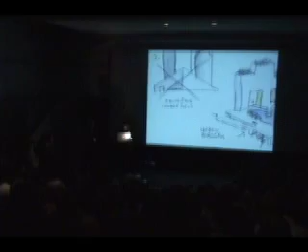Another case is MIT, in the dormitory—I go back and I'm totally amazed at how much junk people put in their rooms. It's incredible how much stuff they can hang in there, like guitars hanging from the ceiling. In other places they have different opinions. So I think it's a charge to go back and look at your work and see how people are using it. It's very important to do that.

So you know this story—I think we're not going to talk about this building much since you know these points. The basic building went into a kind of tailspin in August, when it was casting too much shadow on the adjacent sites. We took the sun diagram that required 2 hours of sunlight on these adjacent houses and sliced the building according to the sun, and that's what gives it its shape.

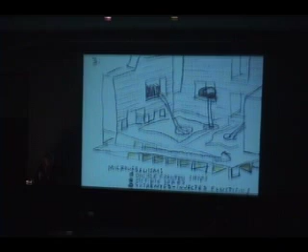It's sliced, and then the porosity and getting up into the plaza is very important—we're getting in from all sides. I think there are like 6 different ways to go into this plaza. And from the commercial retail section, I said the building's a little too big to have one scale, so let's throw in a micro-urban scale.

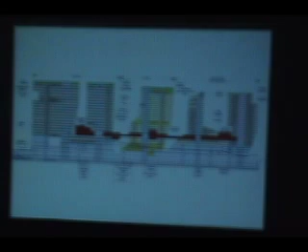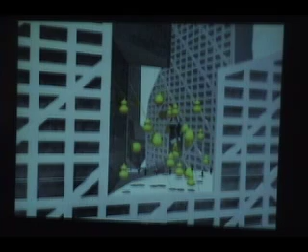So there's Lebbeus Woods—he's got a $1.9 million budget. Lebbeus Woods has never built something so big, he's very excited. And there's Ai Weiwei, the artist doing the Dufu pavilion because he knows about poetry, and there's the provincialist. So here's where Tommy says there is a violent shift here.

So I agreed to be part of this project for the Hudson Yards, which had 5 developers proposing. I told Gary Barnett of Extell, look, I don't need to have like 20 architects—we've got 3 or 4 weeks to design this, let's just let us do it. Then, you know, it's a long story.

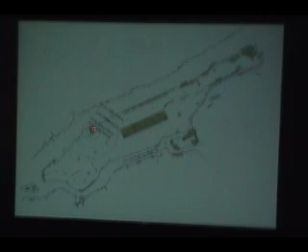But the method to my madness is I wanted to maximize the green space and do something against the rules, like not build a platform over the rail yard. It's a very difficult project because they're trying to build too many square feet and platform over the rail yard. We said, don't build a platform over the rail yard—instead, do a kind of suspension cable and suspend the park like a valley, with natural water runoff making a tributary to the Hudson River. This park was the largest of the 5 schemes by a factor of like 5 acres.

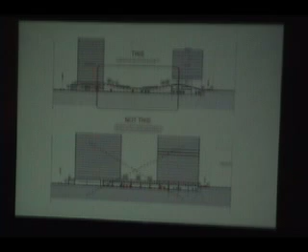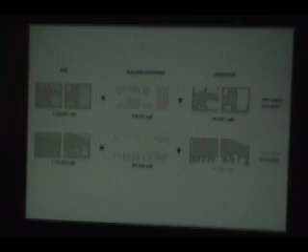I think there was something as low as 5.5 acres; ours was 19 acres of green space. By the way, no architect will get to do this—this is a whole political problem in New York. It shows the planning department's green space versus our green space, which is significantly larger.

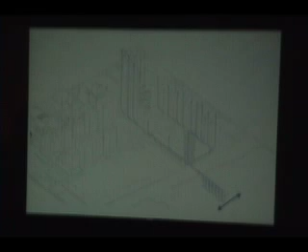We said the New York City plan by Mayor Bloomberg should be fulfilled in this project—it should be all geothermally heated and cooled. Why not? You have a chance, you're building 12 million square feet, ours is only 11, and do it well. You can sink geothermal in the bottom of the Hudson River and do this whole heating and cooling for this whole complex. So that was all.